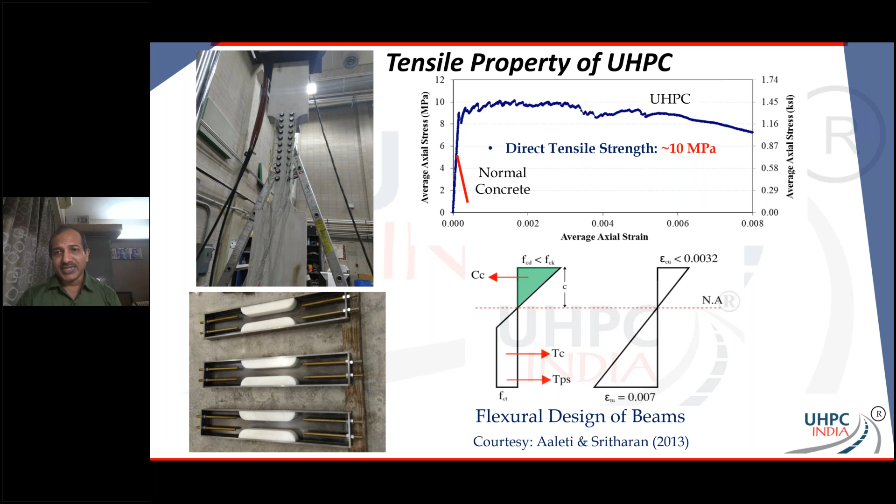UHPC exhibits really high mechanical and durability properties. On the right side is a chart comparing a typical normal concrete, say M40, versus UHPC at about M150, M160, or beyond. The range of UHPC today for structural applications is about 140 to 220 MPa, whereas for non-structural or architectural applications, you're looking at least at M120 compressive strength.

Second, if you look at the creep coefficient of UHPC, it is extremely low. Normal concrete under normal curing exhibits a creep coefficient of about 2, so you do a 2 plus 1 for your creep or deflection calculations. But for UHPC, even under normal curing, the creep coefficient is close to 1.

I'd jump to the elastic modulus at this point. It's as good as about 50,000 MPa. If you run tests, you might get even more, 52 or 54. Believe it or not, people have made UHPC with elastic modulus as high as 65,000 to 70,000 MPa. It's a material that can exhibit really great behavior.

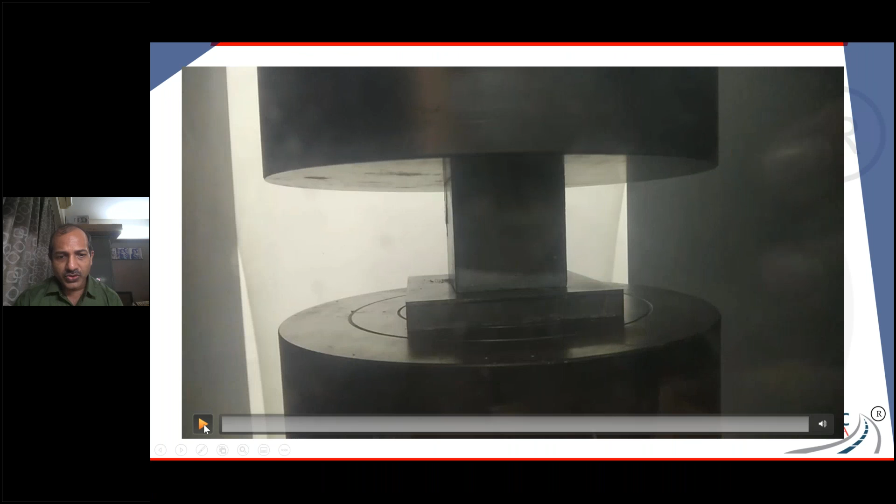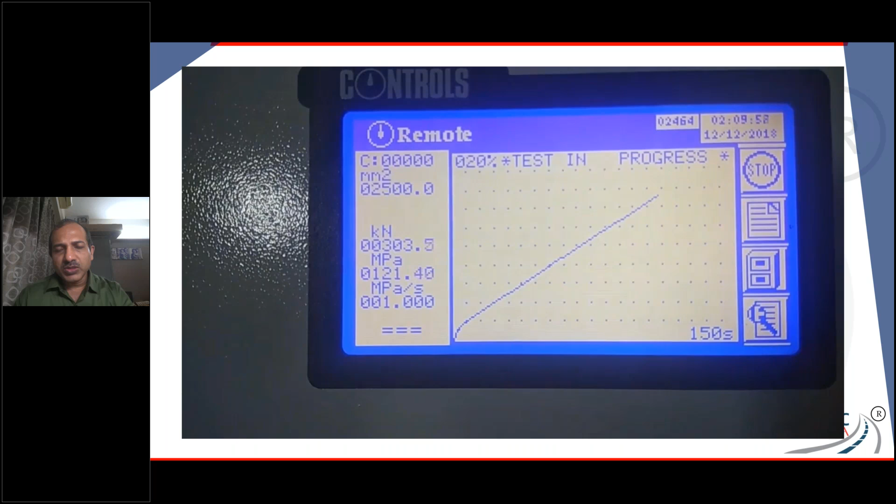One of the main reasons — let me show you this cube strength test, and really show you that you do get more than 150 MPa. Here I'm showing a cube, a very small one, about a 50 mm by 50 mm cube.

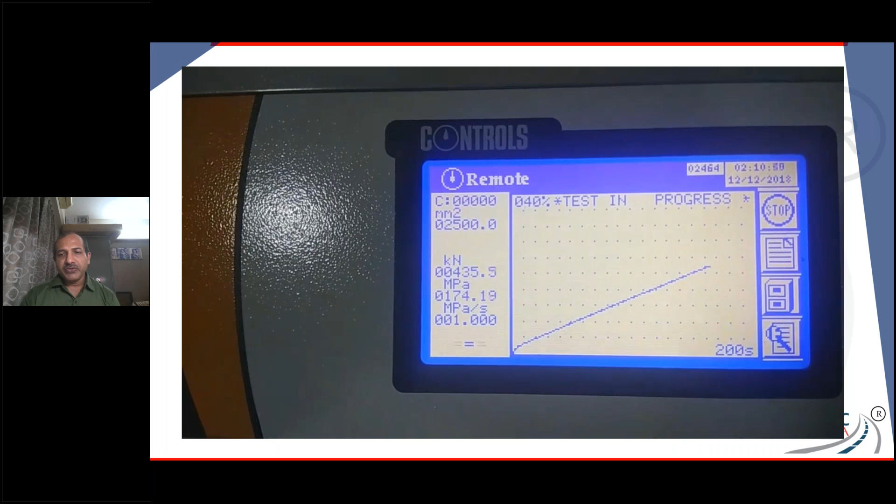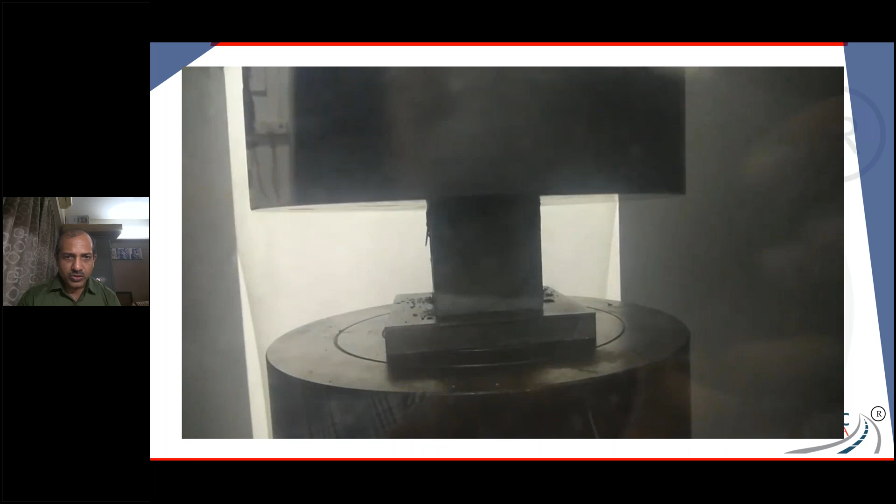For all practical tests, you could use a 50 mm by 50 mm by 50 mm cube, and then confirm that with a 100 mm cube. So initial tests can be done with 50 mm, but final results should use 100 mm. If you look here, the cube is almost close to crushing, and you'll see the strength on screen very quickly — about 196 MPa.

So we have some good strengths here. That's what you'll typically get with UHPC.

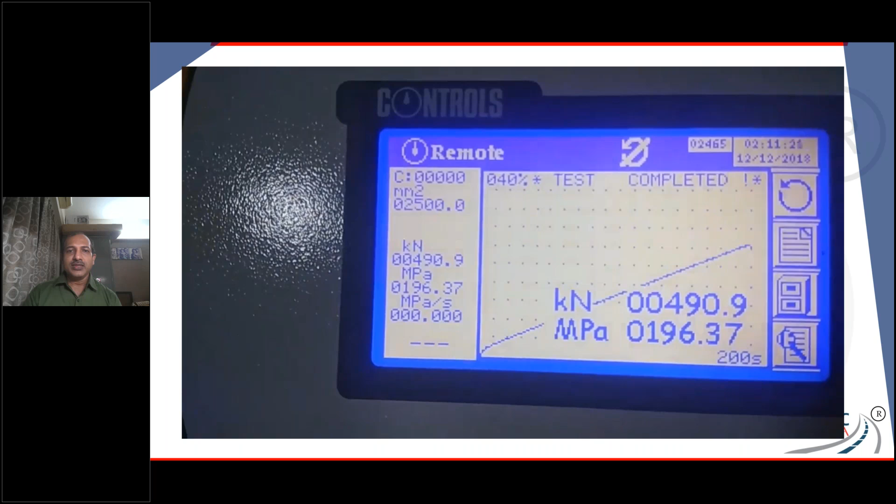Next, I'll show you this screen on the durability performance of UHPC — this is where the word 'performance' comes from in UHPC. The durability characteristics are excellent.

Here is a quick comparison of penetration, water permeability, corrosion rate, etc. In yellow is normal concrete, green is high performance concrete, and see if you can find those little blues down below — that's where UHPC is. So UHPC is extremely watertight.

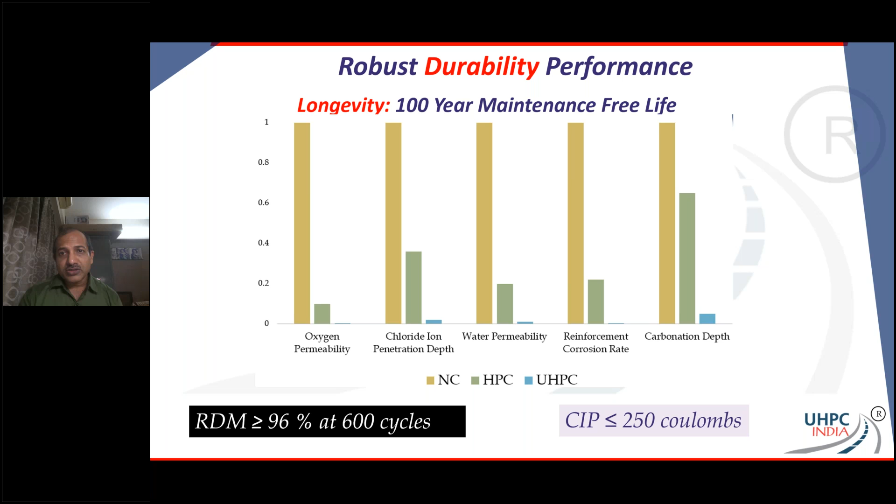The ingress of chlorides is next to minimal. So imagine what you can achieve with respect to UHPC. I'll talk about that here in my next slide very quickly.

Let me bring up the slide. What's your target today in engineering, particularly bridge engineering? We are talking about reaching 100-year service life, or even 120-year service life. But let me change that definition a little bit. Instead of just talking about 100-year service life, can we now talk about 100-year maintenance free service life? That's the key word, maintenance free. That's what you can achieve with UHPC.

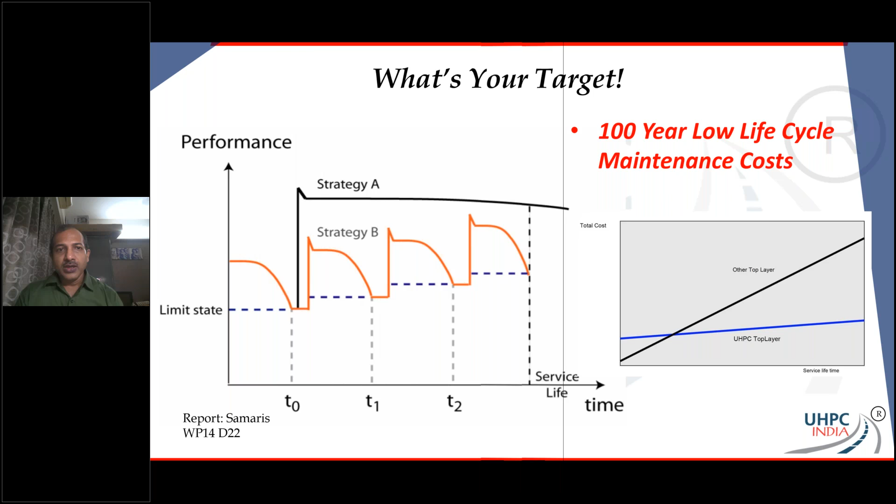So again, it's a material that exhibits extraordinarily high mechanical and durability properties, and performance is the key.

And even in the past, the word reactive powder concrete has been used a lot. In fact, when people started with reactive powder concrete, there were people making about 300 MPa, 350 MPa concrete at that point of time. But believe me, there is no difference between all these 3-4 different nomenclatures, and you're free to use whatever suits you.

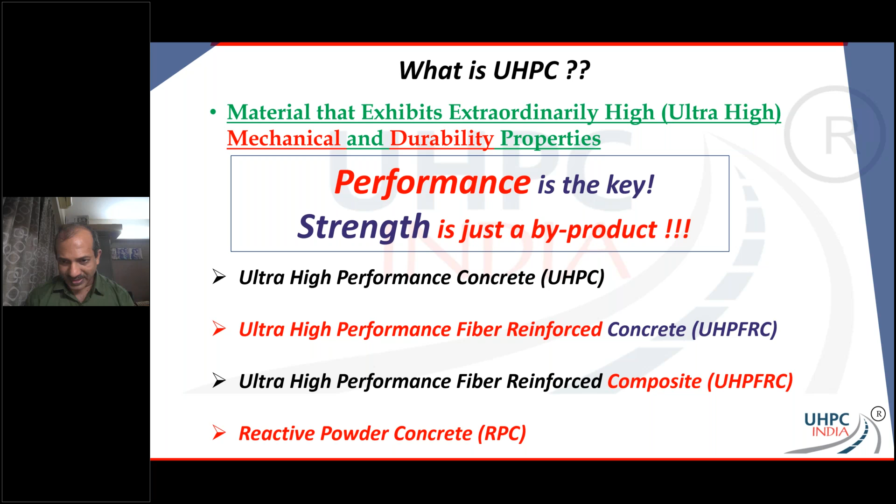One of the other reasons why you should really look at UHPC as something very beneficial, especially in infrastructure markets, is accelerated construction. In 24 hours, it is possible to get a good 60 MPa, 65 MPa strength, and in 3 days you can be touching that 100 MPa mark. Believe me, if you're doing repairs on bridges, you can just pour UHPC, and in a couple of days you're good to open up traffic. That's how good it is. You don't have to wait those n number of days for curing and then open up traffic after 21 days. No, no, no. With UHPC, you can do it in 2 days and you're good to go.

UHPC is also self-consolidating, there is ease of placement. You get nice long workability hours that you can work with UHPC.

One more thing I want to clarify: people who have come across UHPC initially are told that a very, very high energy mixer is needed to mix it. That is true, but at the same point of time, UHPC can be mixed in any other kind of mixer. You can even mix small quantities in a plastic bucket using a mortar or paint mixer, or in a drum mixer. It's just going to take a little bit more time because it's a low energy system. Pan mixers, planetary mixers, twin shaft mixers are really great. Not even that - if I give you a dry mix of UHPC, you can directly put it into a transit mixer and mix it there, just your regular concrete readymix transit truck. And you can pour your UHPC as you want it.

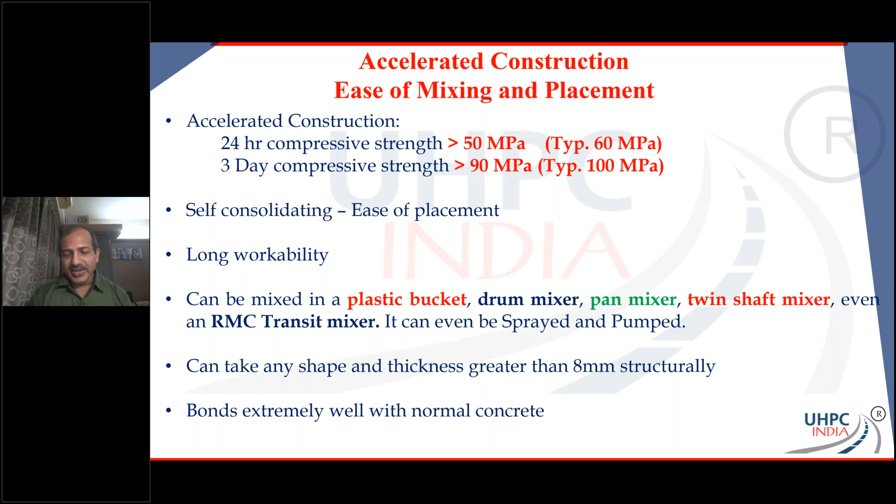If you add about 2% by volume, which is about 156 kilograms per meter cube, you get extraordinary behavior not only in tension but in shear as well. We're going to see that.

But remember, the size is very important. Don't come in and say I can add 0.4 mm or 0.35 mm steel fibers, because even if you add the same 2% out there, you're going to reduce the number of steel fibers, and that's a problem. If you reduce the number of steel fibers, the nice composite behavior of the UHPC changes. So you want as high a number of steel fibers in the mix as possible. Even if you can find 0.18 mm diameter steel fibers, go ahead and use them, because it's going to make the behavior even better.

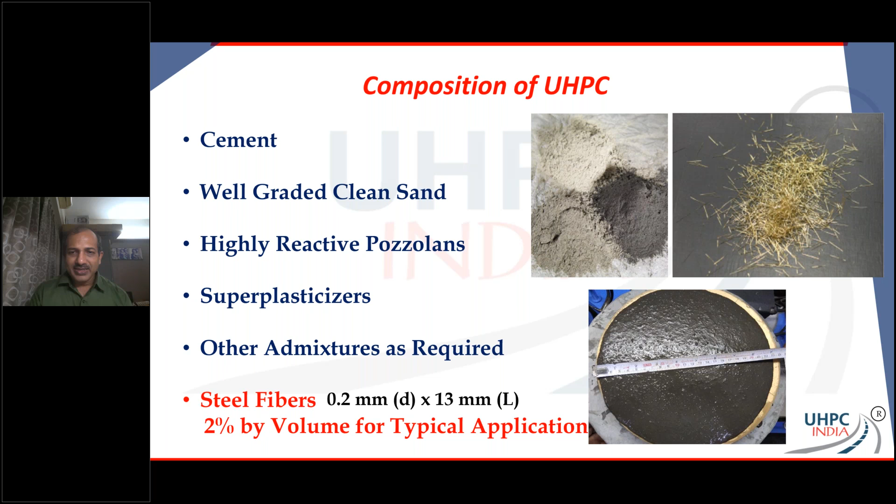In the picture down below, you can see that UHPC flows very nicely. There's a video here that you should be able to see - it's a flow test for UHPC, so you're not going to be using anything big. It's a small flow cone that can be used.

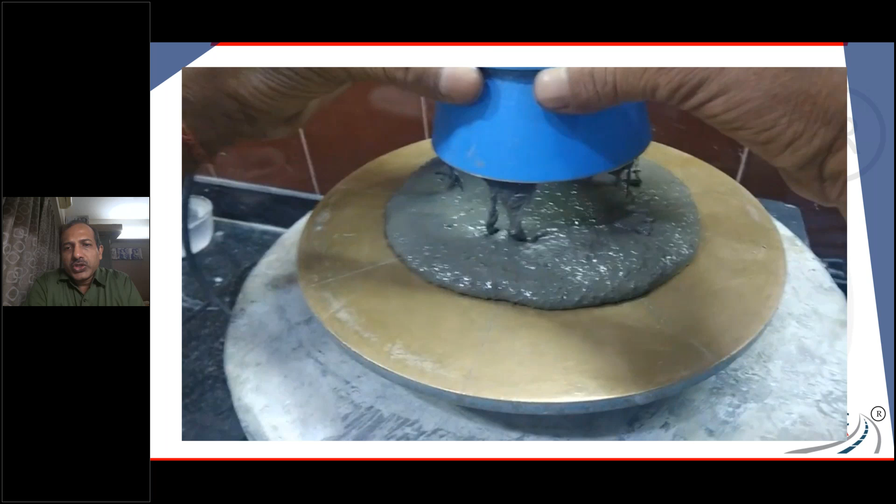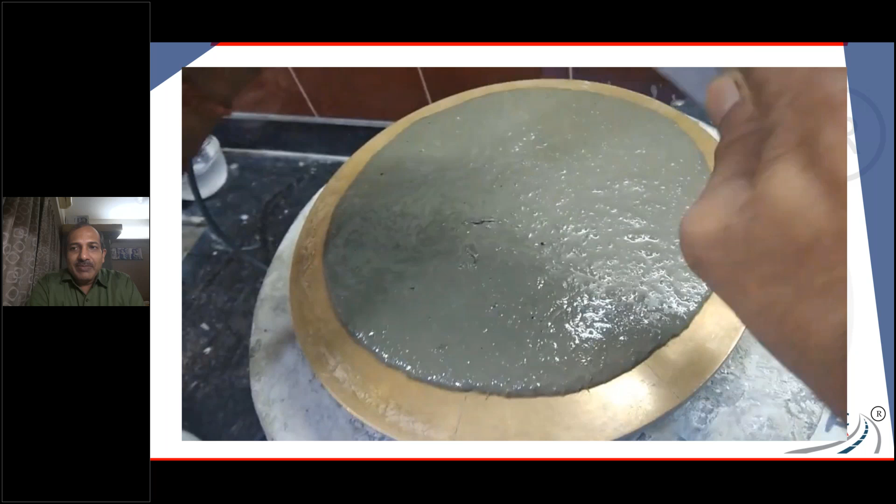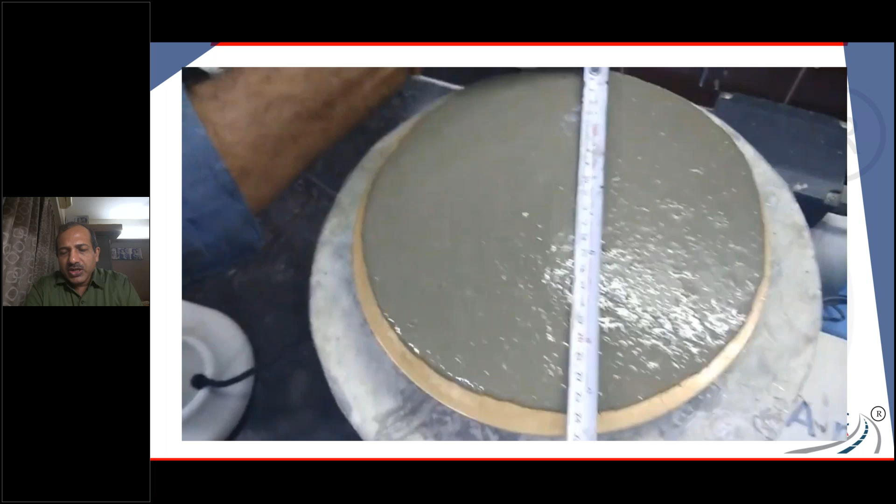Once you do that, you'd want your flows to be anywhere between 180 mm to about 250 mm, based on the kind of application you have. This one really did not require any tamping either - just a very nice flow. You let it flow for a few more seconds, leave it out there, and then take a tape measure and measure it. This one shows close to 24 centimeters, about 240 mm. So pretty good mix thereabout.

Let's move to the next slide - a quick roundabout explanation, or show of projects, different kinds of projects.

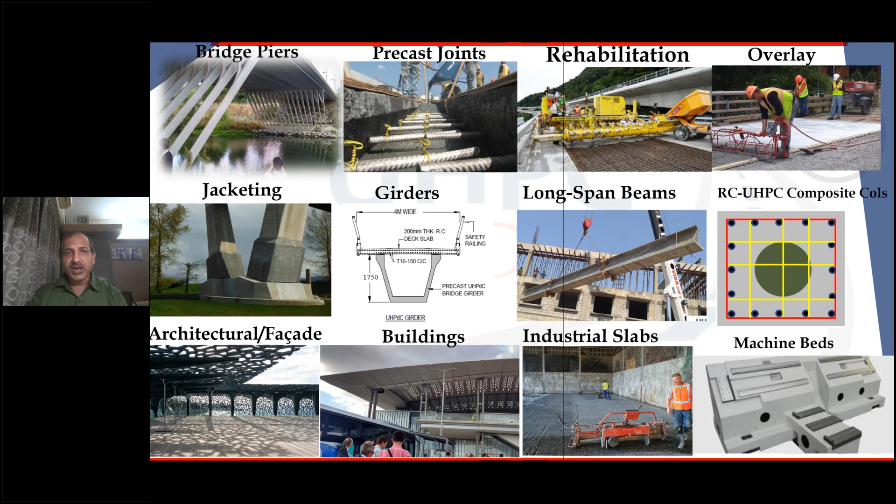So one of the questions that really comes around is, what kind of code are we going to follow? The good news is that the Ministry of Transport, MoRTH, the central ministry, has issued a circular in February saying that the French code can be used for design of UHPC. So it's a great thing - we have some leverage, it's not like we don't have anything right now. The French code NF P 18-710 is a great code that can be used for design of ultra high performance concrete members.

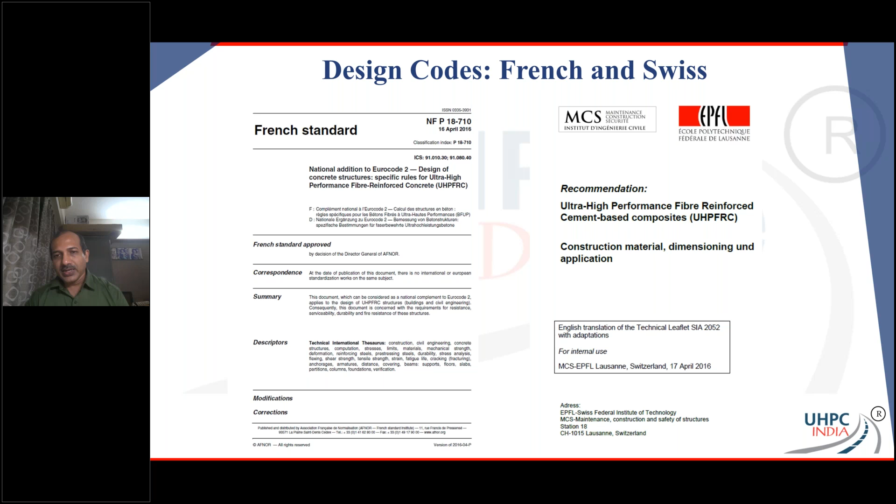Similarly, I would also say that the Swiss code SIA 2052, shown on the right side, is an excellent document that can be used for design of UHPC. Very soon, I hope India will also have its own codal provisions. Meanwhile, the American code for design is coming up - it's in a draft stage, and will probably take another year before it's released.

So very quickly I want to show you the shear strength of UHPC. Without going into the equations, without any rebar, you can get a very, very high shear strength. Believe me, bridge girders all around the world made with UHPC, most of them, almost all of them, do not have any shear rebar.

Isn't it amazing? So these girders can be long span, and long span really works because, as I mentioned, the creep is low. The strength is high, so you can put a lot more pre-stressing into it. Really advantageous, and even the elastic modulus is high at 50,000 MPa. At the same time, the shear strength is also very, very high. So amazing things that you can do with UHPC.

The only rebar I would say you will need, of course you're going to put some here and there, but the only rebar that you technically may need for some of these bridge girders or even building beams and girders is at the interface of your reinforced concrete slab and your UHPC girder, if you're going to have a composite UHPC RCC system.

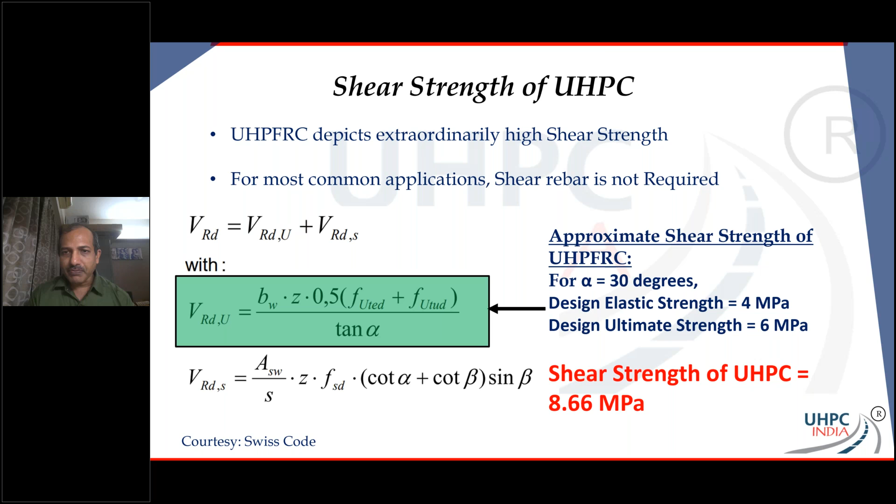So you need something for the composite action and you can put rebar for that. Also, the bond properties are really good with UHPC. If the surface preparation is really good, UHPC bonds excellently with concrete. Not only that, UHPC bonds excellently with rebar as well.

Almost all structural engineers will know that the development length typically for normal concrete is anywhere from 35 times the diameter to 50 times the diameter of rebar. But with UHPC, the development length comes down as low as 15 times the diameter. Isn't it amazing? Now you can reduce congestion by putting UHPC in the joints. Similarly, UHPC is very good in bond with pre-stressing steel as well.

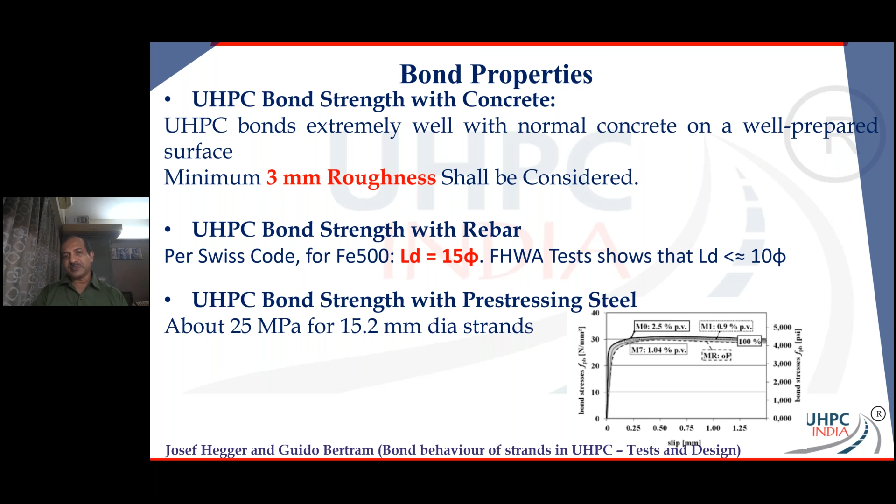I'll come in and start showing you some applications because it's a great way to look at projects. The very first project in India was a school with two spans of 7 meters each, done over 2 stories. The owner said, 'Oh, at the top story, I want to remove the internal columns.'

What do we do? I don't want to increase the load on the external columns, because as soon as we move from a 7 meter to a 14 meter span, the weight of the girders typically increases. So we gave a UHPC option wherein the self weight actually reduced by 30% compared even with the original version that was there under construction. So it was adopted.

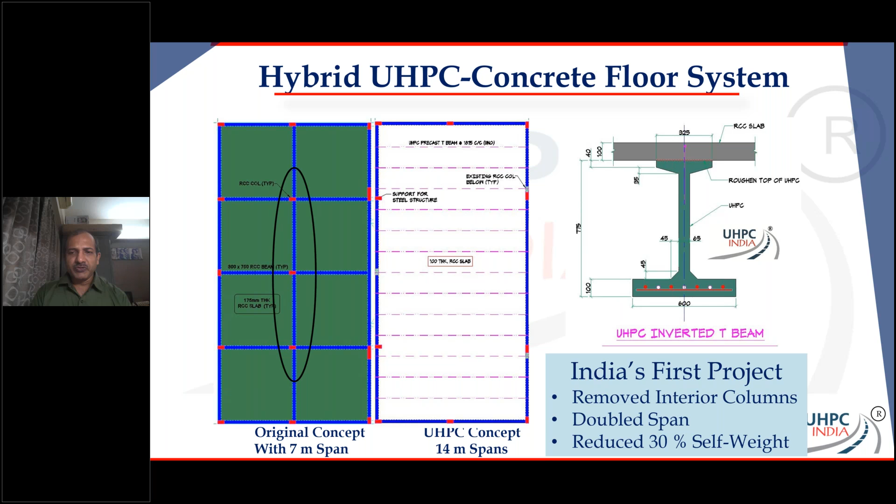This project got completed last year, a little bit over a year back, from 21 February to March, early April, and it's performing nicely, happy to say that. So this is what it looked like on site. This was the very first project, post tensioned, with 14-meter long beams. You can see the UHPC pour going in very nicely.

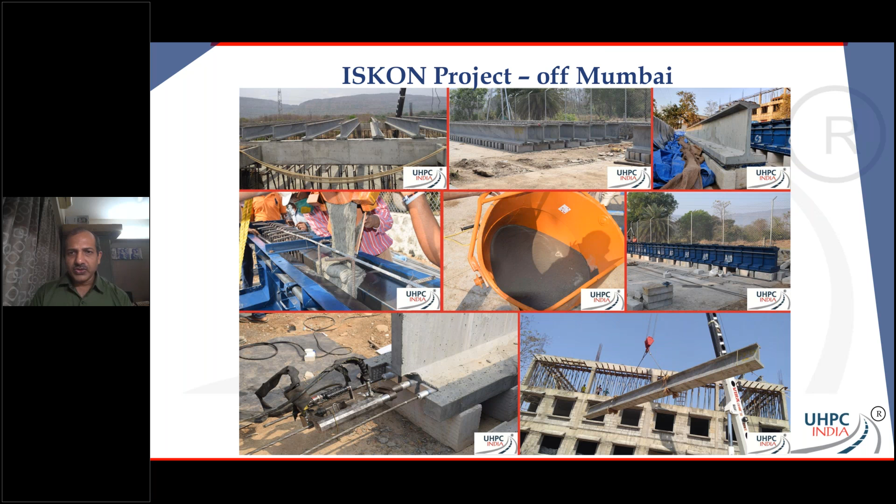So here is a video I want to quickly show, how you can move from a dry mix to a wet mix. Now this video is not very clear, but in between it will go dark. Right now it is in a dry condition. Let's see how the video streaming is, how well everybody is able to see it. In a few seconds, it's going to turn from dry UHPC to wet UHPC.

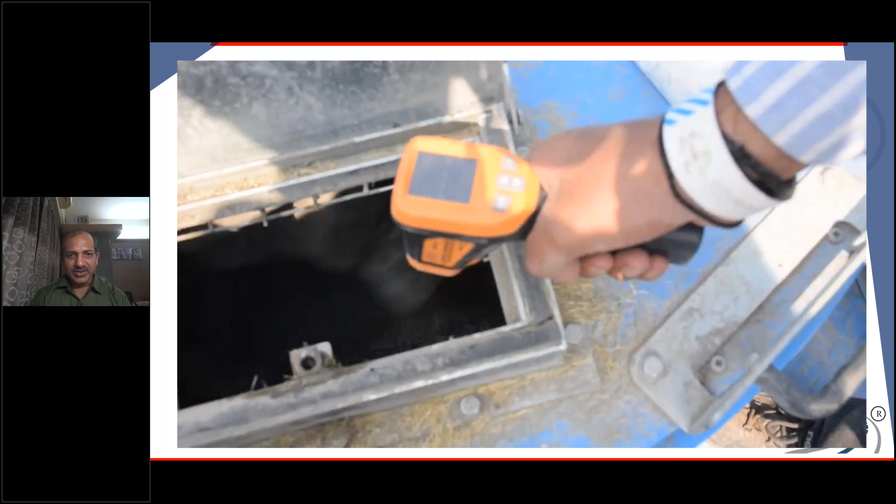On my screen it's pretty fast, but I'm not sure how it's coming on your screen. Let's hope you're able to see that. If you have any questions later, I'll be happy to answer. And here it is, nice wet UHPC, flowable UHPC. You can see that inside.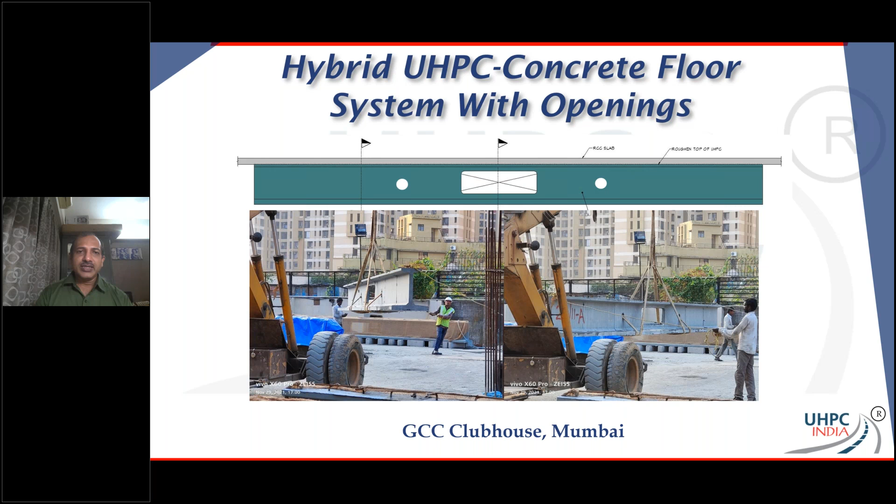Here's another video for you, let's hope this goes. Just want to show that this UHPC was mixed in a transit mixer, a TM. It did not come from a plant. And it's flowing out now, flowing out very nicely into the formwork.

Should I just repeat that? I'll repeat this so that, if you missed it, you're able to see it again.

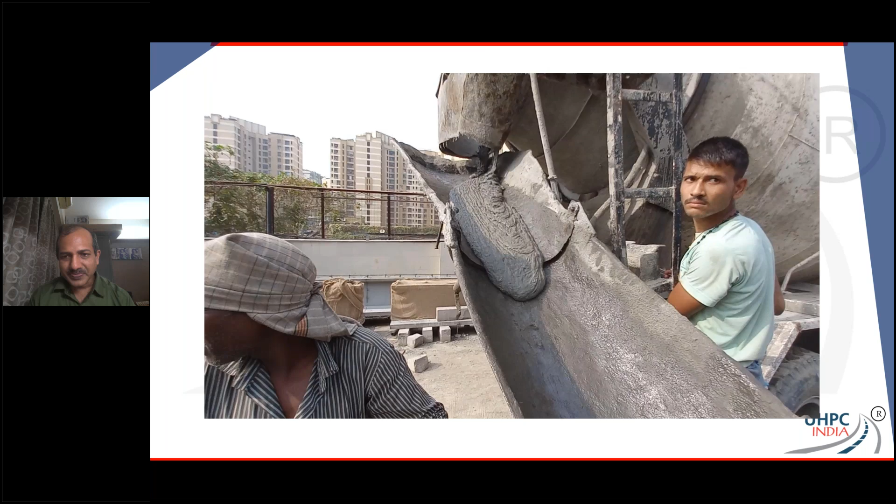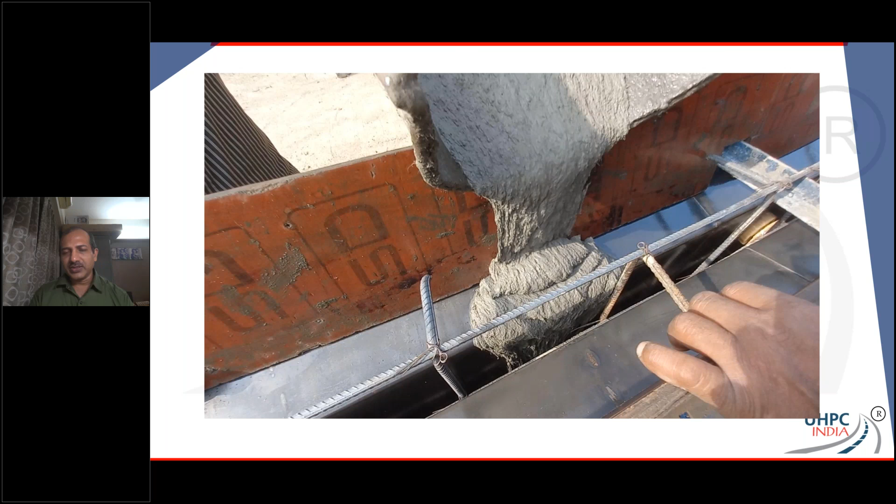Now you can see that UHPC can be made in a transit mixer. This is a nice little bungalow project that we completed in Tirupati, and you can see the bungalow over there. We did all kinds of things with UHPC in there.

There were these precast steps that we did. We did the cast-in-place joisted slabs. There were composite columns with concrete on the inside and UHPC on the outside.

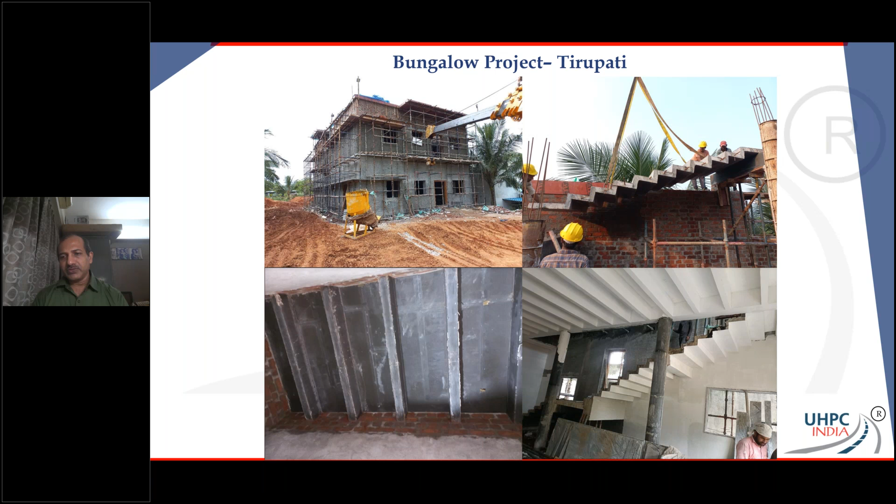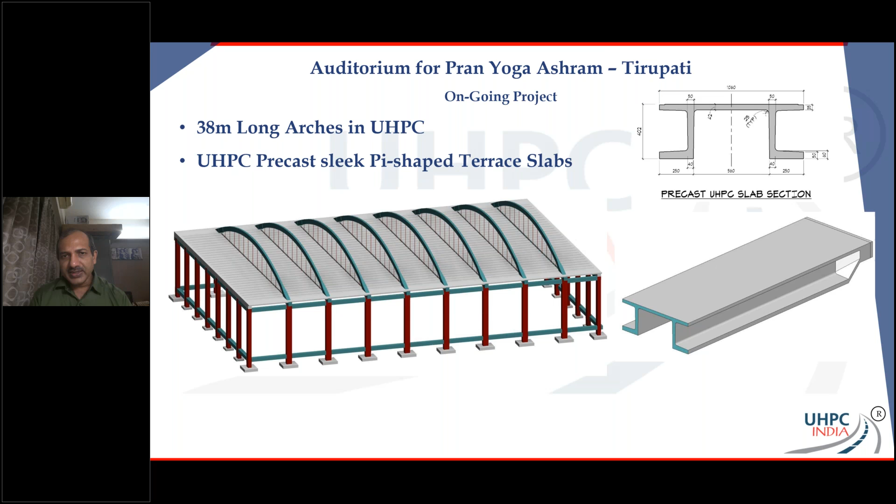The terrace slab, the water tank, all kinds of things were done with UHPC. Another thing on the table here is long span arches in UHPC, and I hope that's going to come fast on the field. There's an industrial slab we're working on, again a heavy duty industrial slab. And UHPC girders compositely connected to an RCC slab.

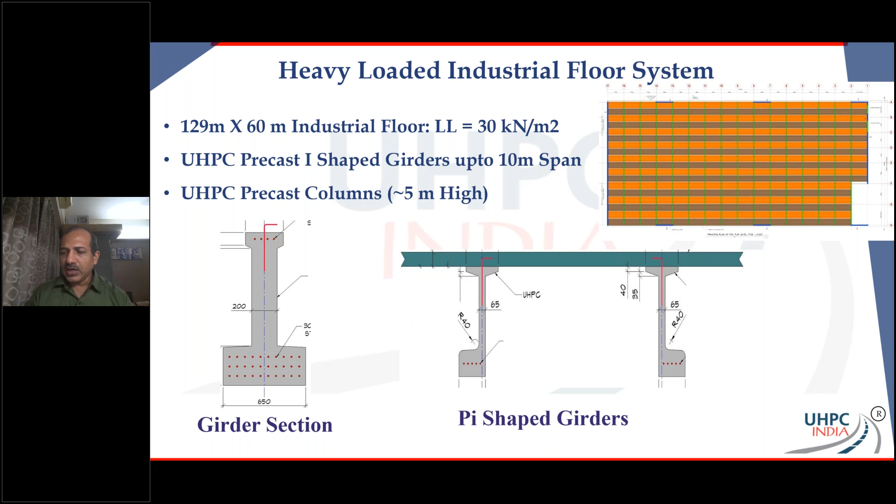Although UHPC is anywhere from 25 to 40 years old, we are only now learning about it. A lot of work was done in France, Denmark, Switzerland, and Germany early on, and kudos to them. Believe it or not, I first heard about UHPC in a very different form, not that word, but I heard it in India in 2002.

Yes, 2002. So that's almost 20 years back that somebody was talking about making 120 MPa concrete mortar in India. Of course, people thought that he was crazy, and nobody wanted to believe him, but here we are.

Around the same time, work was going on the world over, and this is a project in the United States, the first work of UHPC in the United States. A bridge was made, and they were of course conservative while designing it because it was the very first bridge. It's been almost 18 or 19 years, and a full-scale testing was done on this bridge, because they wanted to make sure that it's all good. So they did a full-scale testing of the bridge girder.

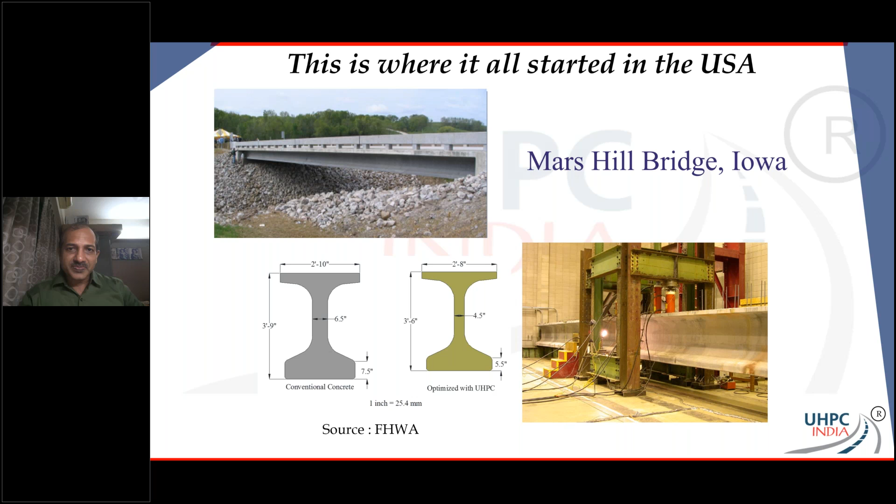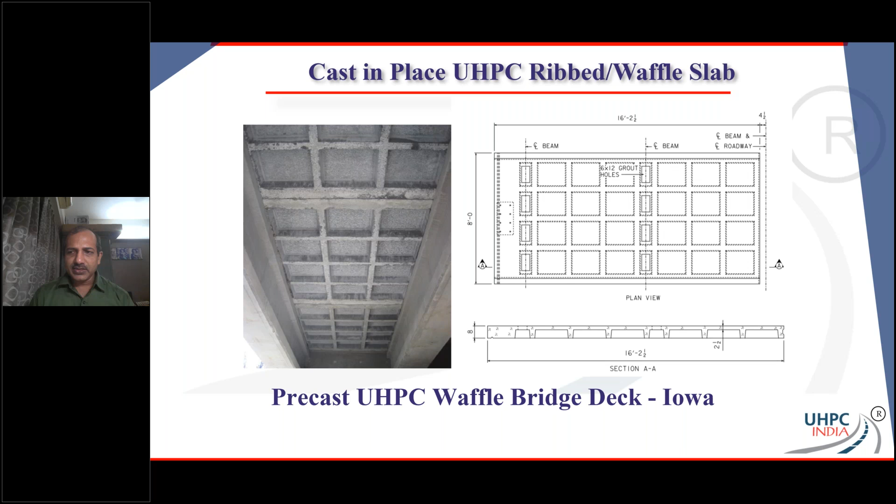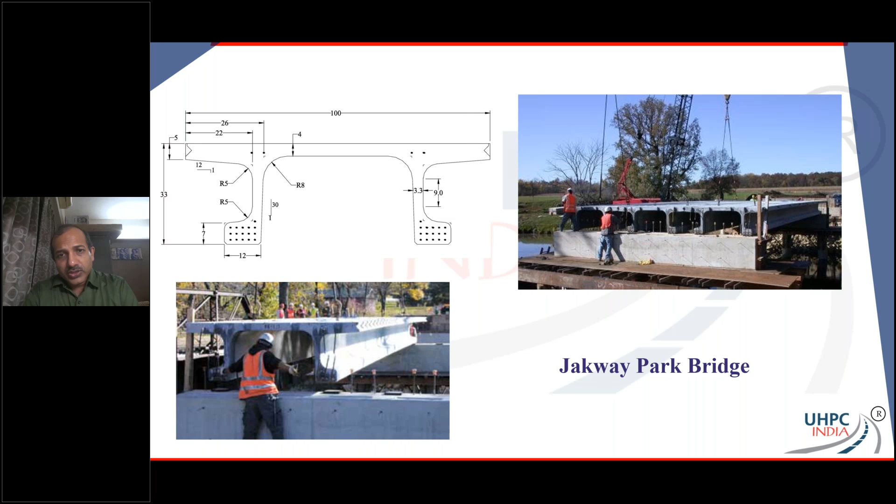Another project here, and you will see that this is a pi-shaped girder. Both the deck and the web are in UHPC, cast at the same point of time and put together. These were also jointed using UHPC overlays. UHPC, I said, is very durable, and that is one of the reasons it is being used worldwide as a layer over concrete bridge decks.

It's also used on industrial flooring, since it's very good in abrasion resistance. So on bridge decks, if I use anywhere from about 30 mm to about a 50 mm thick layer, you're good against moisture penetration and against deterioration of the rebar in the slab or the beams below, and you're going to have a long life.

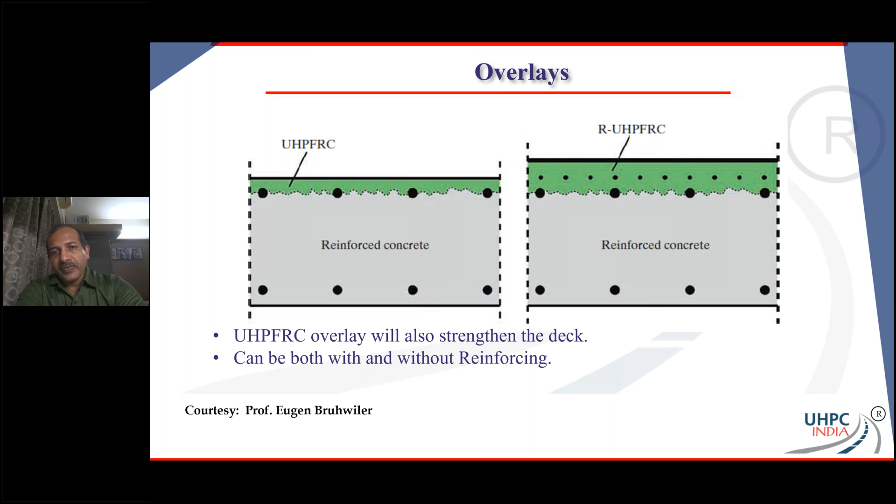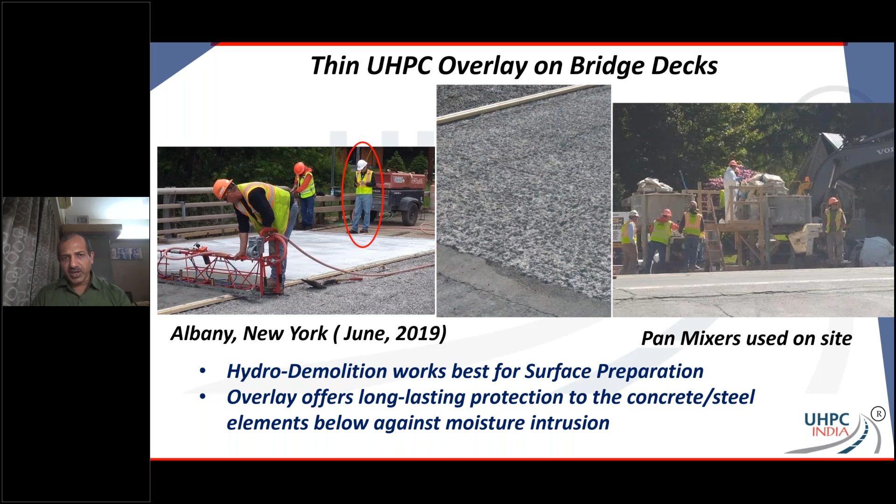Quick picture in the middle, I want to show you first. A very good surface treatment or surface preparation was done, hydrodemolition was used. On the left-hand side, you see a simple screed vibrator that was used to screed up the UHPC, and immediately afterwards a curing compound was put over it. On the right-hand side, you see pan mixers, and UHPC was brought in jumbo or bulk bags and just dumped into the pan mixers. Then they put ice, mixed it, and once the mix was done, they put the fibers, mixed it again, and then poured the UHPC.

Another bridge in Switzerland where strengthening was done using UHPC. Just want to show you that it's being done around the world.

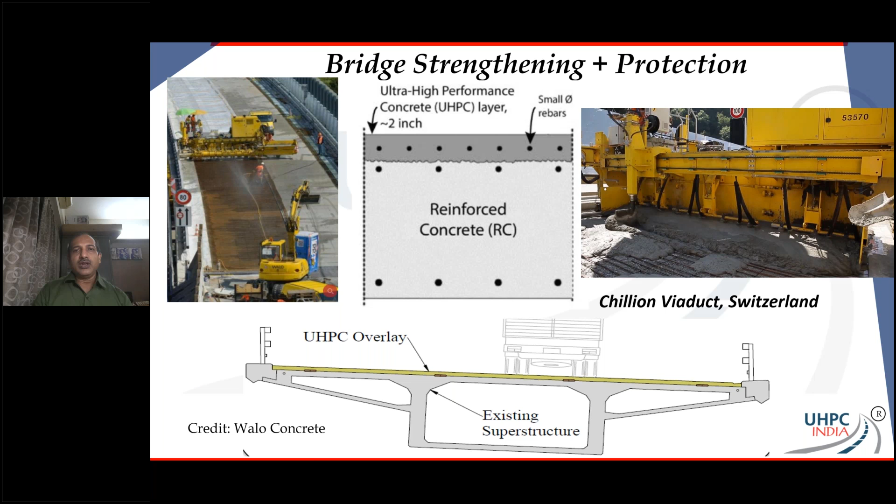This is one of the biggest places where UHPC is being used now around the world, and that is joining any kind of precast elements. Top left, you see at the center of the slab the UHPC patch, shown in dark gray, right, so it's very, very easy. Bottom right, you can see a UHPC detail that's so slim and narrow, and immediately to the left of it you'll see a conventional detail, when normal concrete or high performance concrete is being used.

If anybody remembers, I said a few minutes back that with UHPC, the development length of the rebar is just about 15 times the diameter, and that's why you have this slim UHPC joint. UHPC is so much better in its properties that your joint is never going to go bad. Typically, every project joint is a problem, but once UHPC is in, it's not going to be a problem for you anymore.

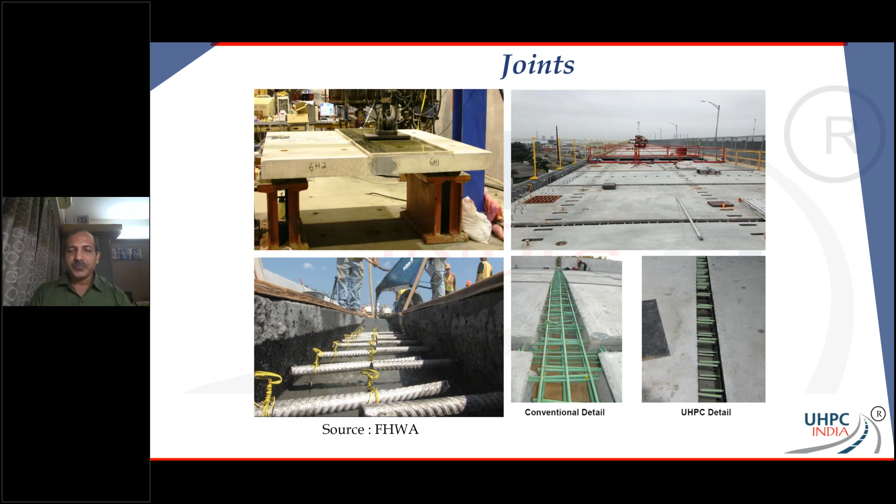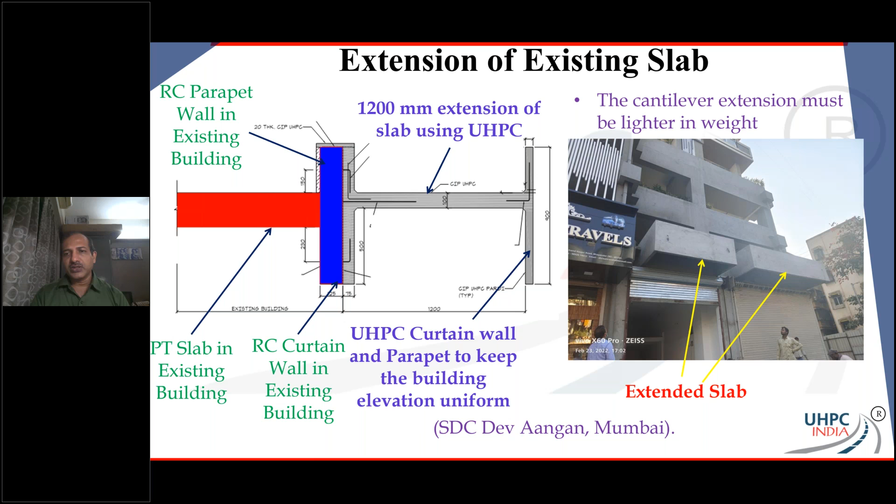Quickly show you that UHPC is a major repair and rehabilitation material as well, and we have done some work. A new building, when the shops took over, they wanted to have some kind of covering over that, so we were able to add these UHPC extensions in front of the building. They were lightweight, and they really worked out well. This is in Mumbai, though.

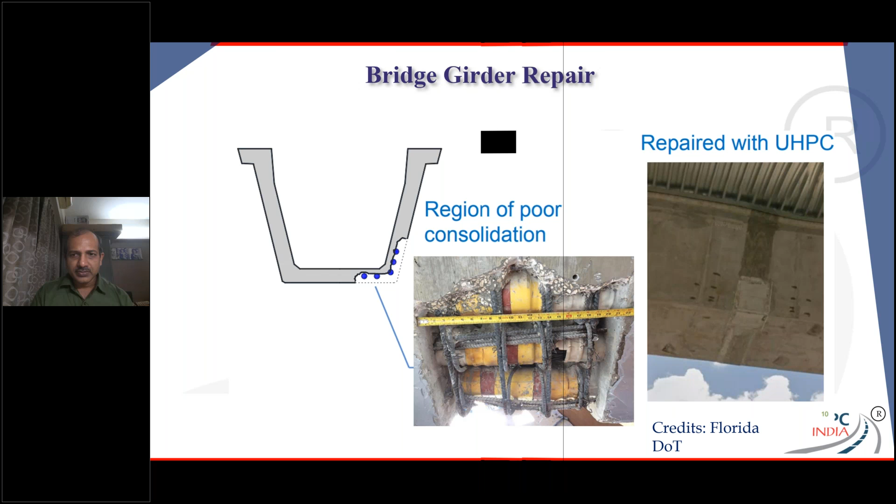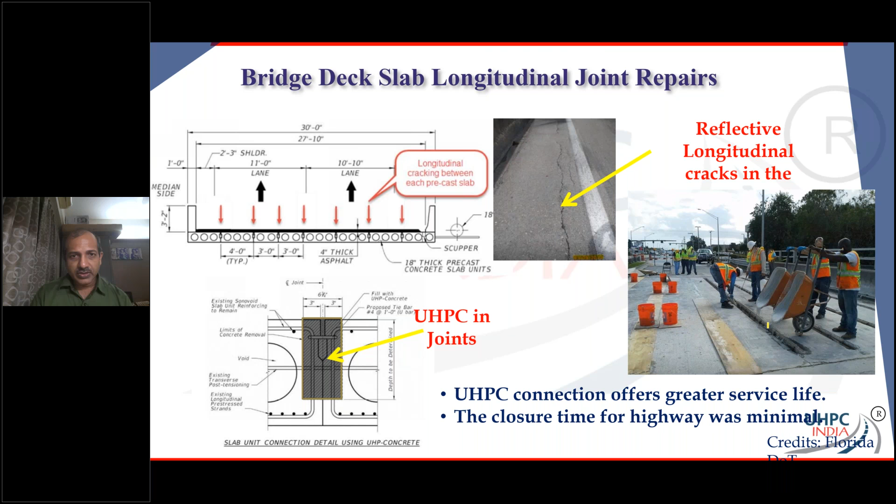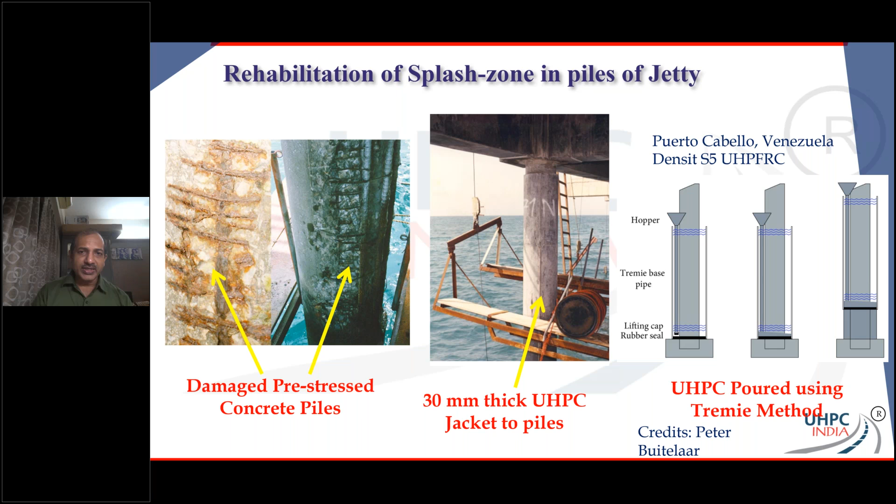A country you don't hear about in India so much, Venezuela, even they have been using UHPC, and this is a marine application. You see that damaged pre-stressed concrete piles were there. They added a 30 mm thick UHPC jacket to the piles, and called it good. It's a great repair material. So you can now extend the life of these piles by another 50, 70, 100 years. Very simple - otherwise these piles could not have been used that easily. So now you increase the longevity of the structure.

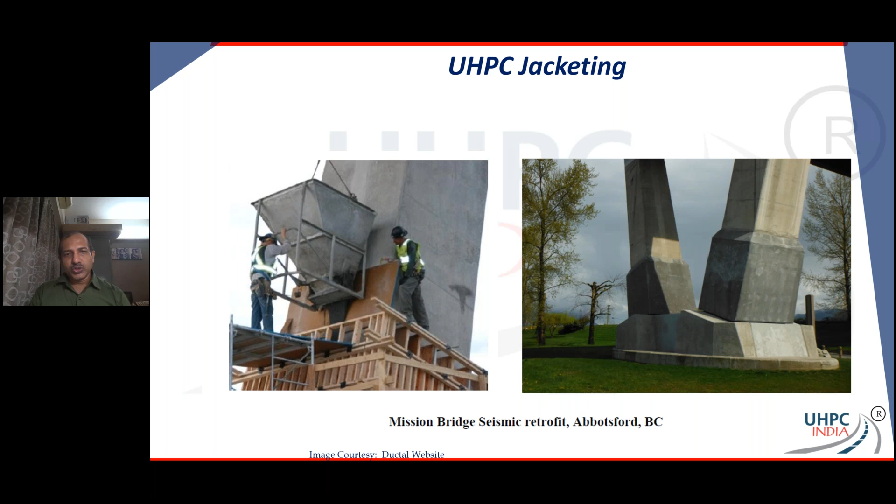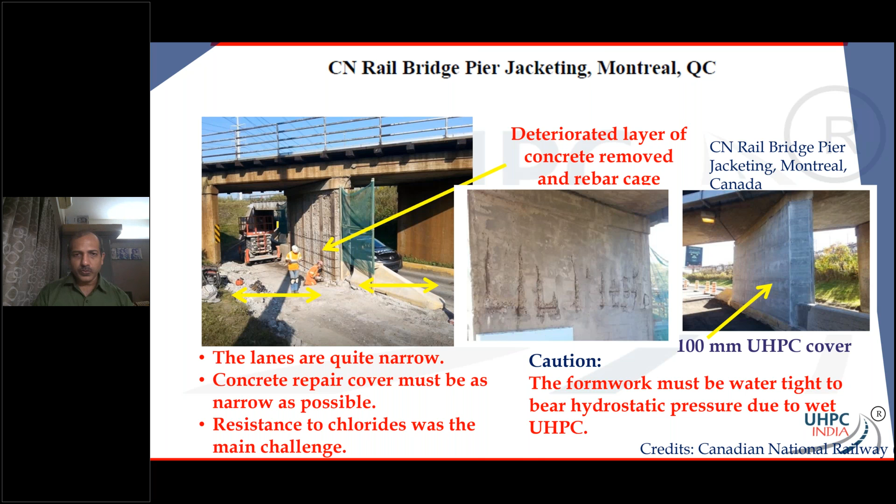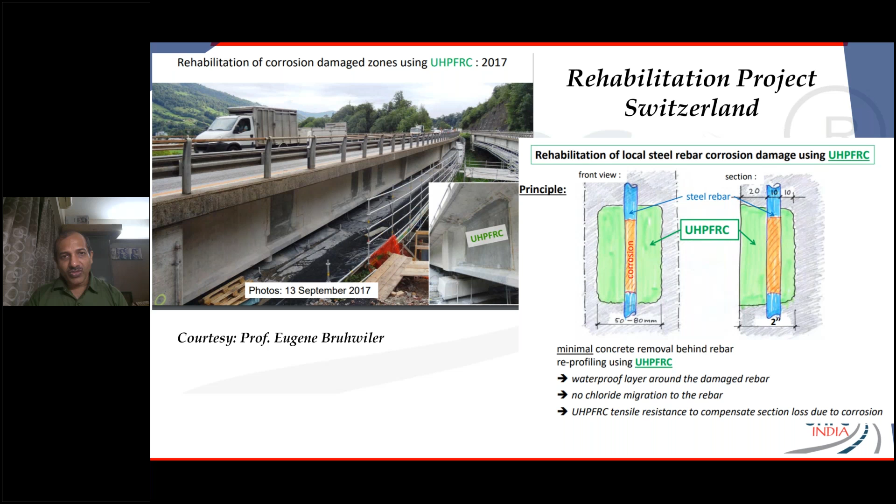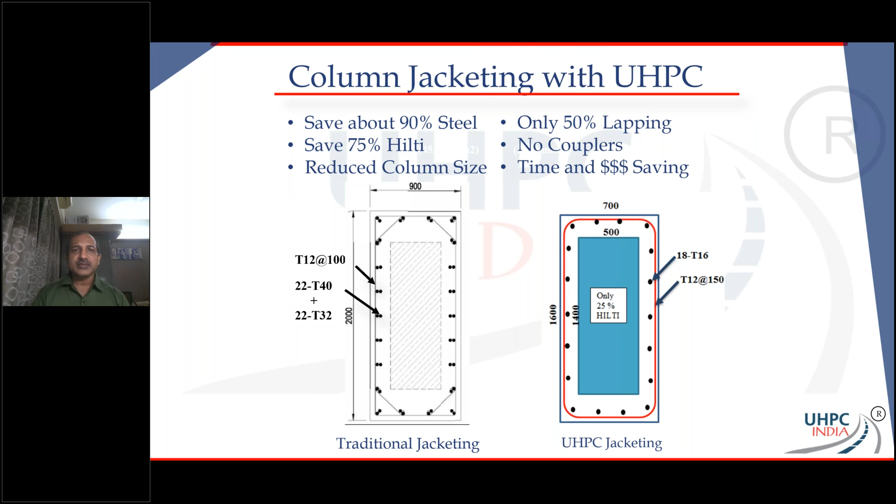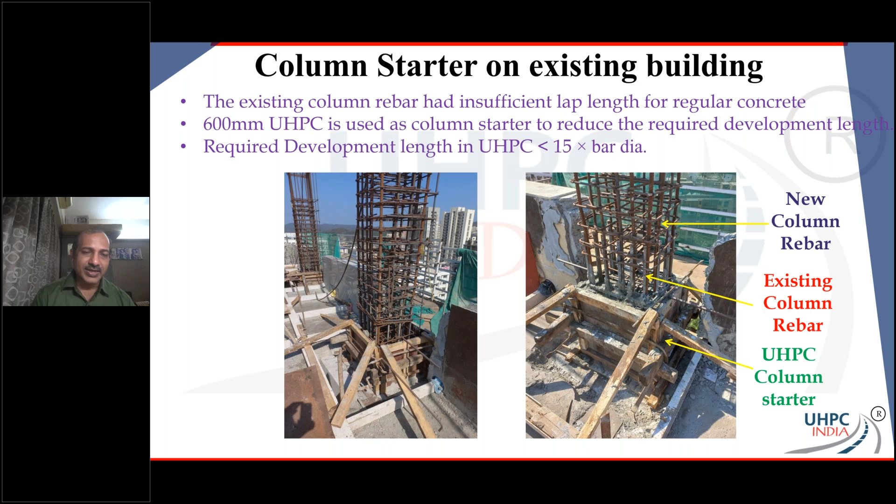Amazing what UHPC can do for you, right? Save a whole lot in repair and retrofitting. Another project where there was a problem - the lap length was not available. Sufficient lap length was not available, but it was sufficient enough for UHPC. So at the bottom UHPC was poured, and then above it normal concrete was poured again. Simple things where UHPC can be used.

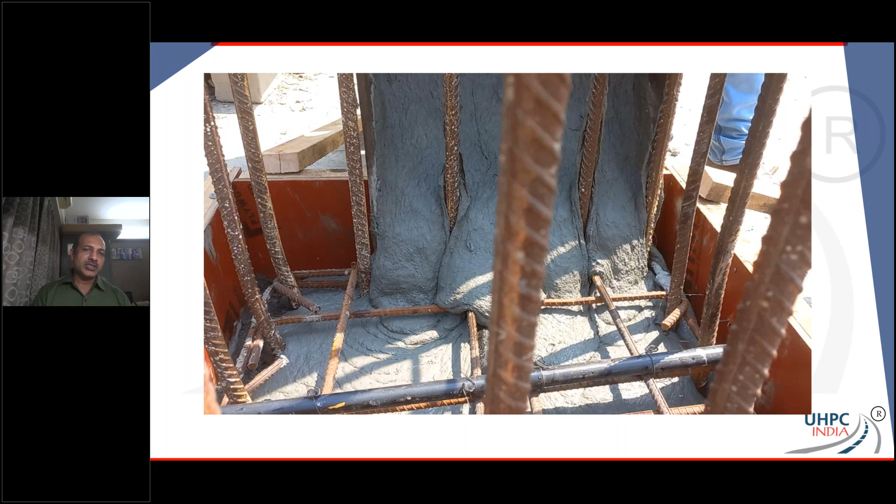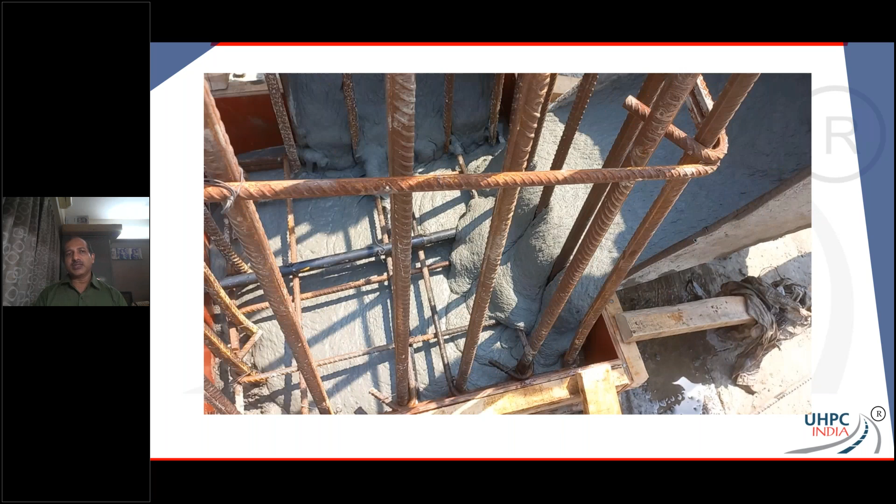Here is a quick video of UHPC being poured, a starter being poured on a column. It's a very short video, and you can see how nicely this flowing UHPC just fills up this entire space.

Let's move forward. I'll quickly show some projects in general and move to bridges so we can finish up fast and get into questions.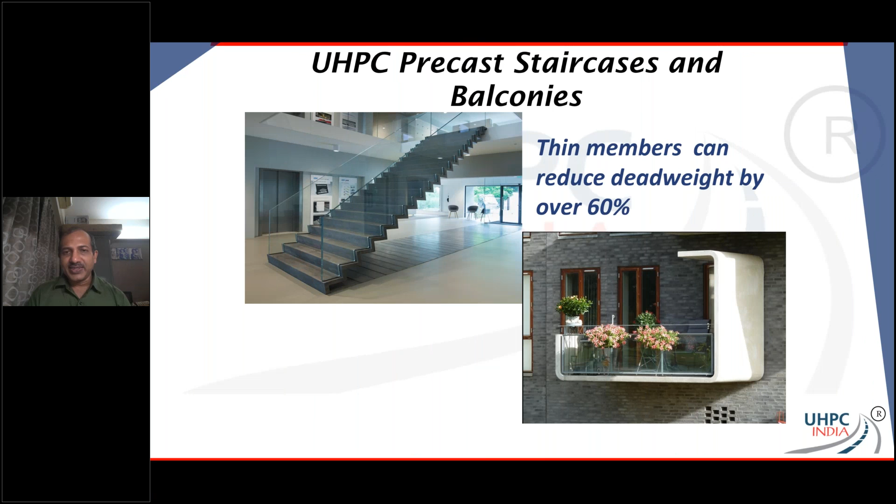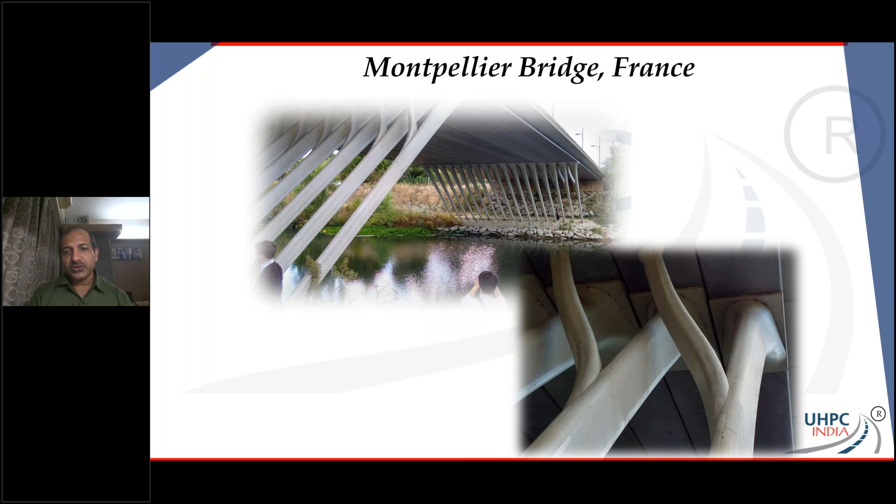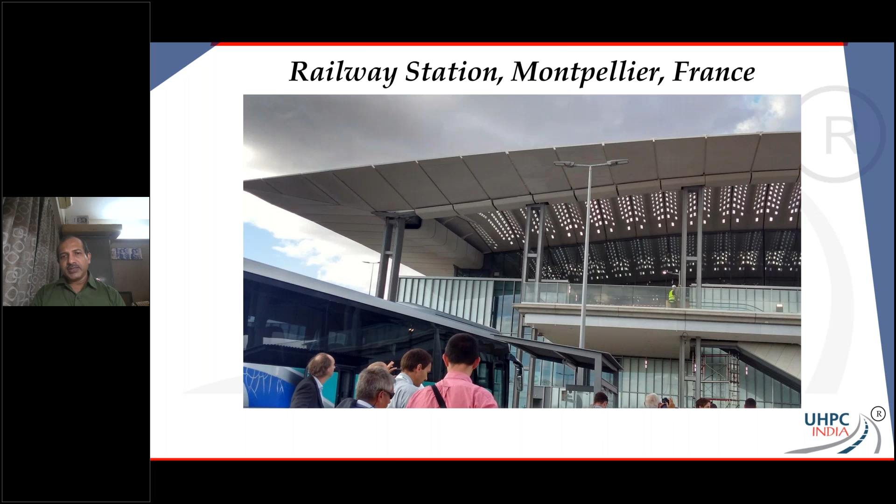Beautiful bridge in France with both girders and pencil thin piers. Amazing what you can do with UHPC. Here's a nice railway station in France, again in Montpellier, southern France. You can see huge cantilevers and amazing vaults with skylights. Beautiful station.

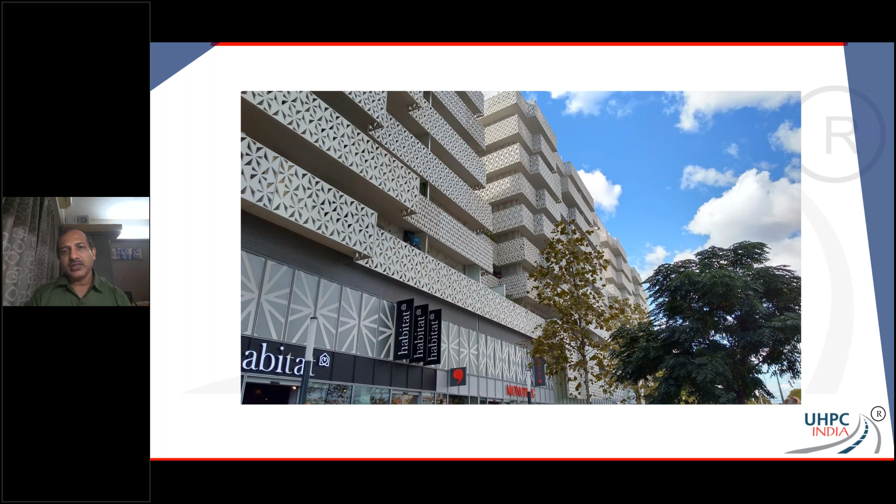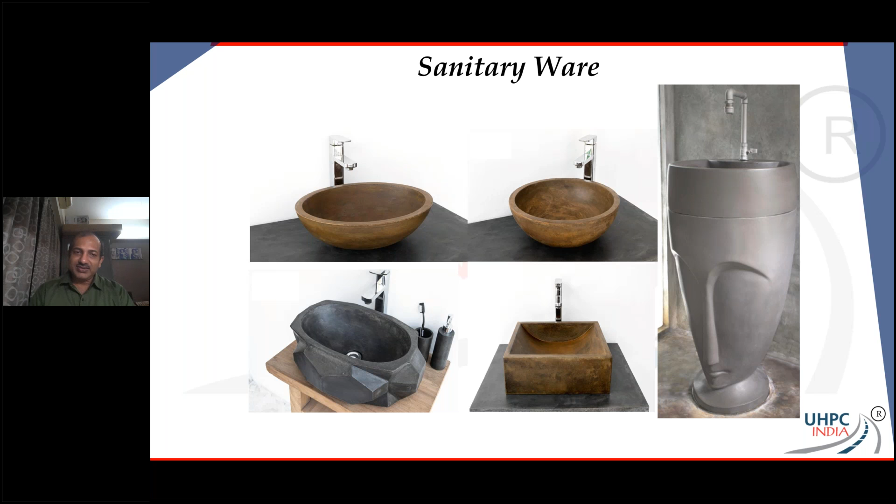Here's a facade, again something so nice that can be done with UHPC. And if you want, there are people doing wash basins and sinks out of UHPC. It's in vogue, a bit costly, but if you want one, these things are coming.

Before we end, I'm going to show some quick comparisons. There are some bridges we're doing comparisons on for infrastructure projects. On the left side I'm comparing a typical PSC girder for 29 meters, and suddenly you see the UHPC size has come down so much. But don't worry, I'm not saying this just for the sake of saying you can reduce about 62% in weight.

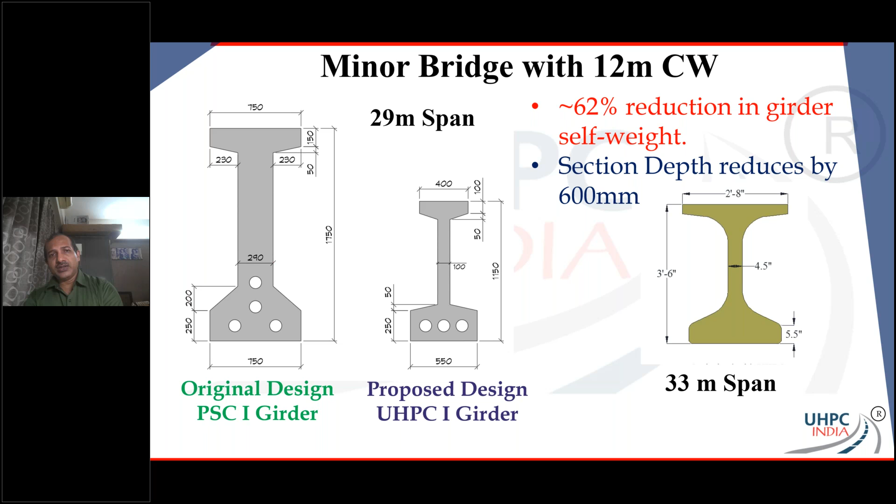The size of the first UHPC girder is almost the same, and that was actually 33 meter spans. So believe it or not, you can really come down on the weight of girders with UHPC. And how does that help?

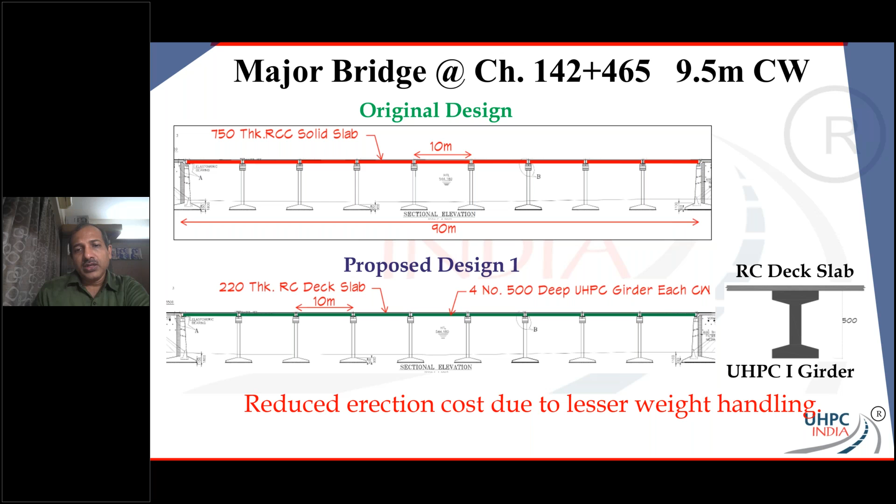See, there's this original design of 10-meter spans, just has a solid RCC slab on it. But if I change it to precast RC deck slabs, 220 thick, and precast UHPC girders, it's going to save a lot of time in erection. Number two, the amount of concrete savings is almost close to about 2000 cubic meters. There are steel savings too, and of course some UHPC and PT addition, but a whole lot of concrete is being saved.

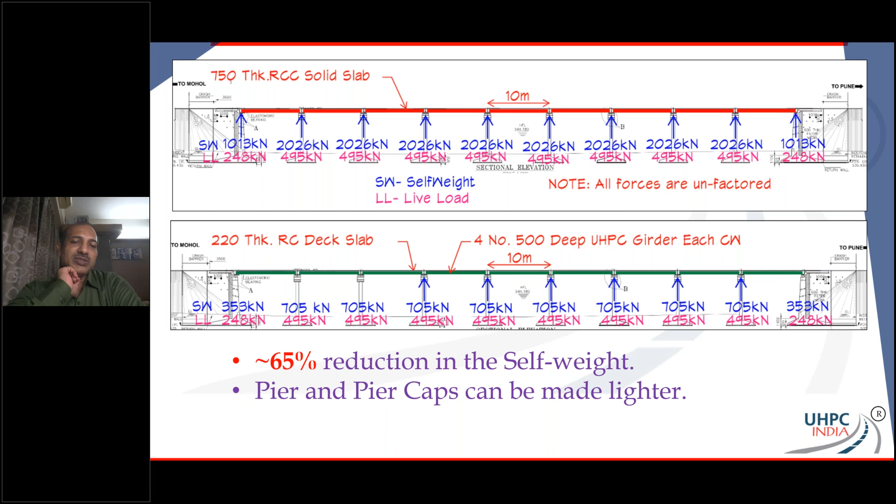Next, what's really important: if you look at the comparison of dead loads, the original version has dead loads at the piers of about 2000 kilonewton, but with UHPC that number comes down to about 705 kilonewton. So now you can design leaner piers and leaner foundations using UHPC.

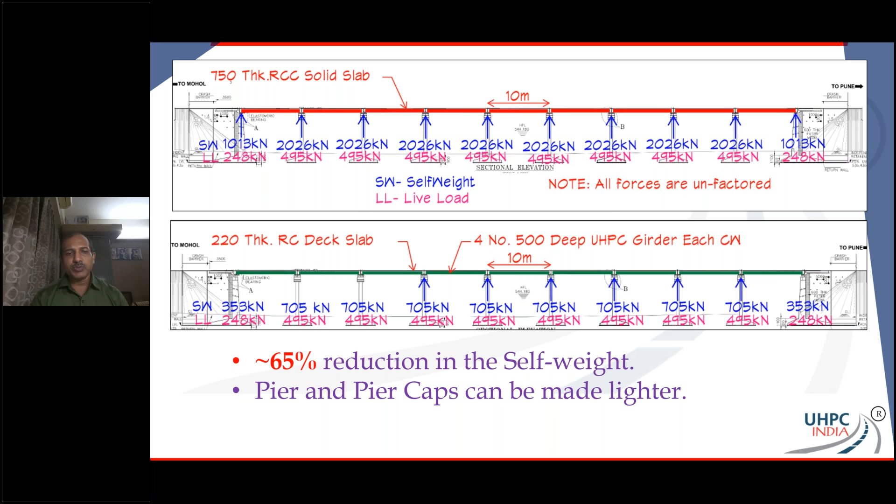There's no span change here, that was one of the proposals, just a lot of weight reduction. But in another proposal, you can do really long spans with UHPC. Instead of 10 meters, you can go with 20 meter spans and remove those alternate bridge piers, which means a lot more savings in both time and money, and amazing how quickly you can go and come out of the project.

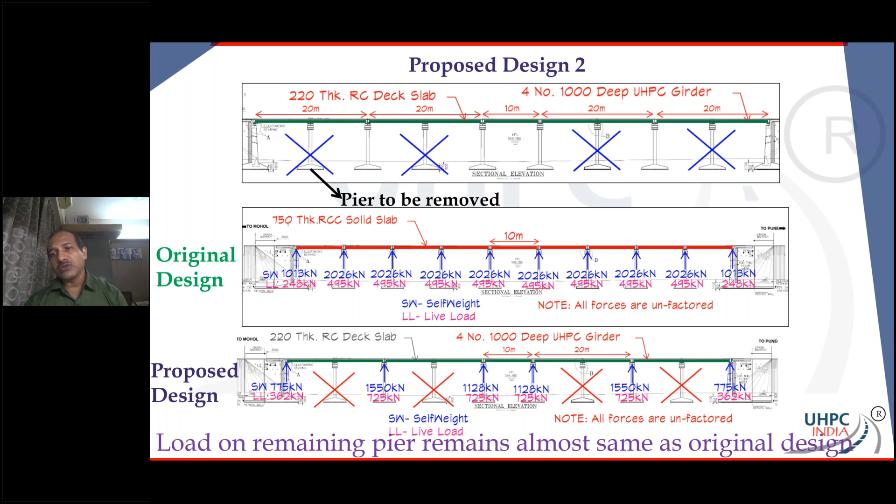And here's the last slide, I'll leave you with a thought. UHPC is a material between concrete and steel. Please, it's not just concrete, it's very, very close to steel in a lot of ways because of its ductility. So it is a material between concrete and steel.

People ask me about cost, so here's how I'll put it. Imagine there was no structural steel, nobody knew about structural steel, and if only concrete was used, we know concrete is somewhere about 7,000 rupees a cubic meter for good high strength concrete.

And if I came to you and tried to sell structural steel, the first thing you'd ask is how much per cubic meter will structural steel cost me. You're not going to ask how many rupees per kg, you'll ask how many rupees per cubic meter. And you know structural steel is probably going to cost somewhere about 7 lakh rupees per cubic meter. Immediately you'd discard the material.

But you and I know, and everybody in the world knows, that structural steel is also an excellent building material. It's used for projects worldwide, and you can design economical projects. Just the design methodology and erection methodologies are different than concrete.

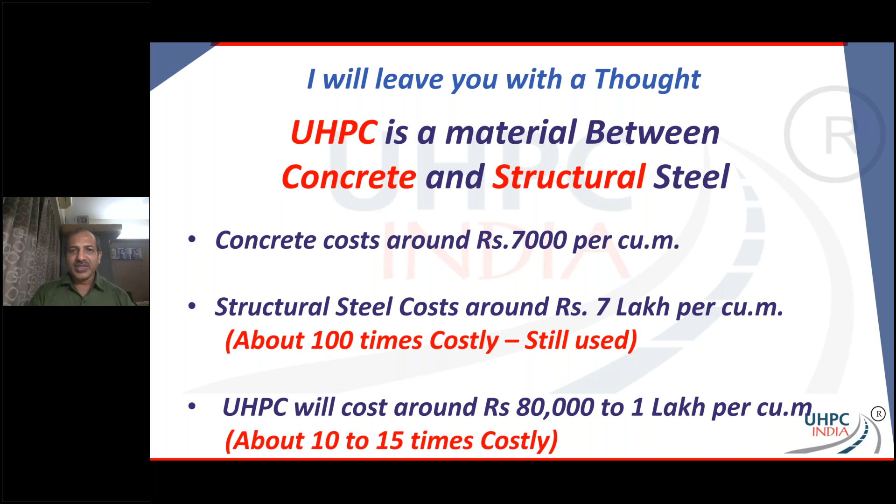The first question: is there any special design for UHPC than conventional concrete? Is the curing period similar to conventional concrete? Asked by Mr. Hemant Kumar. Yes, you will have to come up with your own design mix. There are several available on the internet on Google, but you definitely have to come up with a very good design mix for it. Curing is pretty much the same, so you can use water curing, no special curing measures needed. But if it's an overlay project with more surface area exposure, I'd prefer you immediately use a curing compound over the top of screeded UHPC, and that would work well for you.

Thank you, sir. The next question: is there any limitation on the maximum cementitious content? Asked by Subramanian Shivaramkrishnan. Nothing like a maximum, but UHPC's cementitious content is going to be very high. Even the cement content can hover anywhere between 700 and 1,000 kgs per cubic meter, plus your microsilicas or other pozzolans that you might want to use along with that. So cementitious content is going to be high. You just need to be careful with your design mix, and also look at your shrinkage parameters and everything else.